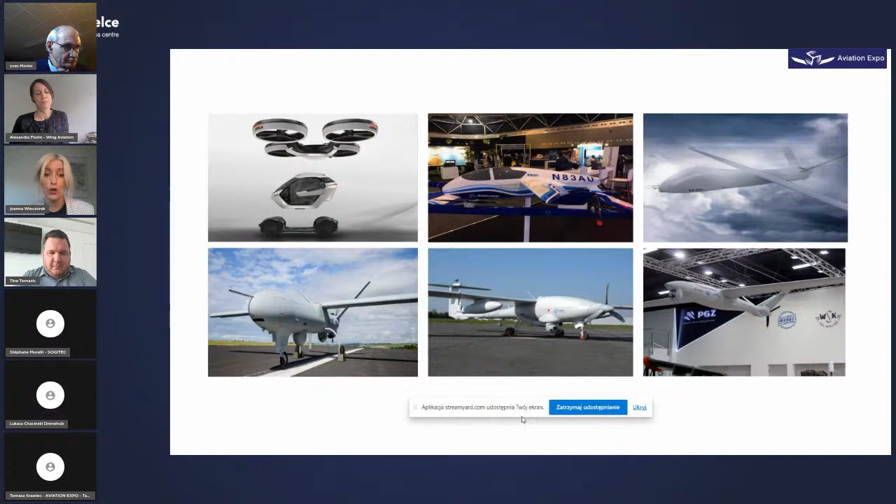As you all know, drones have many functionalities. We are here at this webinar, and we are all from the aviation sector and from the drone sector. But our audience, our viewers, sometimes are from different sectors. So I would like to just mention that drone applications are very large. Sometimes people will be surprised: how can we use a drone? For instance, we can save someone who is drowning at the seaside.

We can also use drones in agriculture. We can also use drones in the insurance sector for roof and site inspections. In Poland, there is a company called Flytronic, and they are using drones in order to reduce smog during winter time. We also can use drones for crime prevention. Łukasz Chaciński, representing Dronehub company, will talk about one project conducted with the European Space Agency, which is focused on crime prevention. We can also use drones for entertainment and leisure.

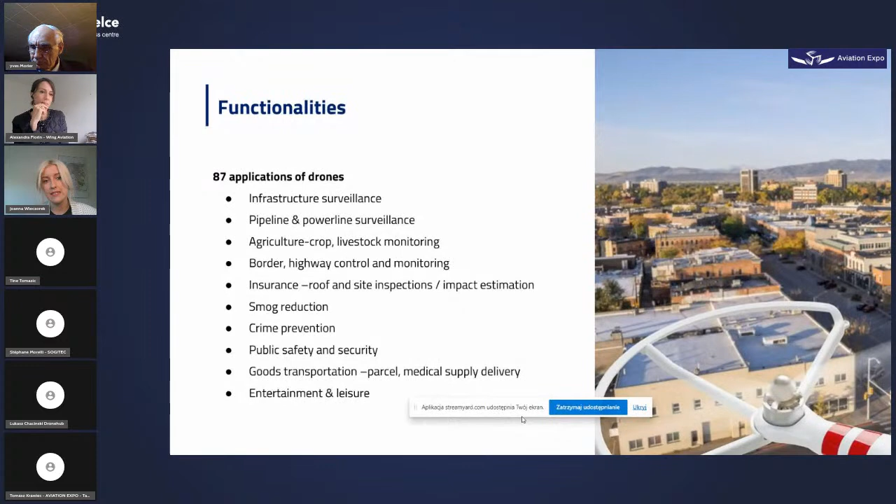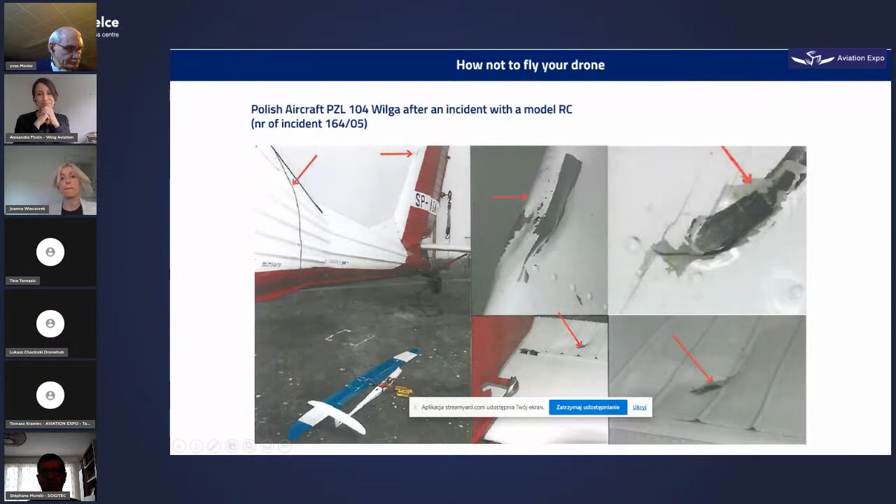Yves, do you hear us? If you need to unmute, it's in the left corner. Okay, do you hear me now? Yes, we can hear you. Okay, good morning everybody. Now I will try to work with the presentation. Do you see the slides? Yes, we can see it. Okay, thank you.

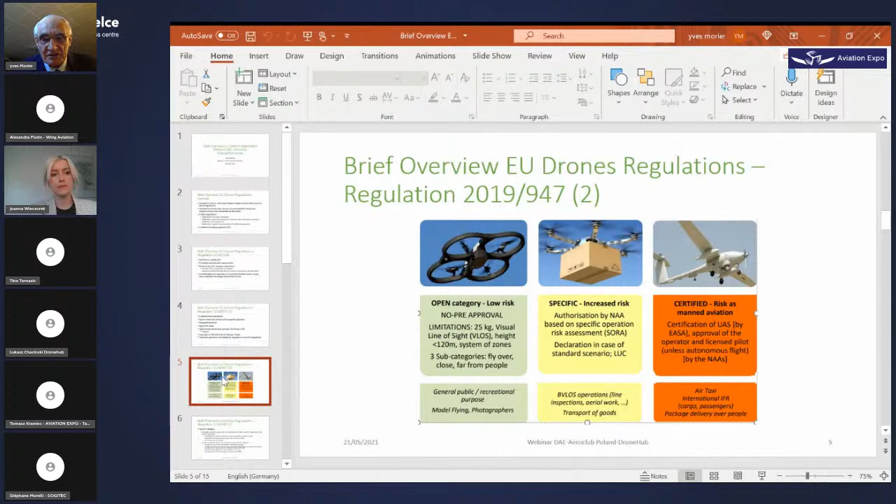Continuing on the specific category, so the principle of authorization after risk assessment, we have a simplification called the predetermined risk assessment, which I have summed up in the backup slide. The idea is that for some particular kind of operation, a risk assessment has been established a priori, and if it is being used, and if the mitigations are being used, this should facilitate obtaining the authorization.

If you apply a standard scenario, which covers low risk operation in the specific category - I have also put the two approved ones at the time being as backup slides - then a simple declaration would suffice. So here we come to a real simplification, but you have to apply strictly the mitigation measures included in the standard scenario.

Finally, the light unmanned aircraft operator certificate contains some privileges, and depending on the privileges you have, you may be allowed to start operation without obtaining an authorization. One point I just wanted to highlight is the design verification process for drones in the specific category.

In the case of lower risk, a simple declaration is enough. Where the risk becomes medium, a design verification by EASA will be performed, and EASA issues a report that includes any limitations or assumptions under which the report remains valid. So it's not a certificate, it's not a type certificate, it's a design verification. Finally, for the higher risk in a specific category, a type certificate may be necessary for the drone.

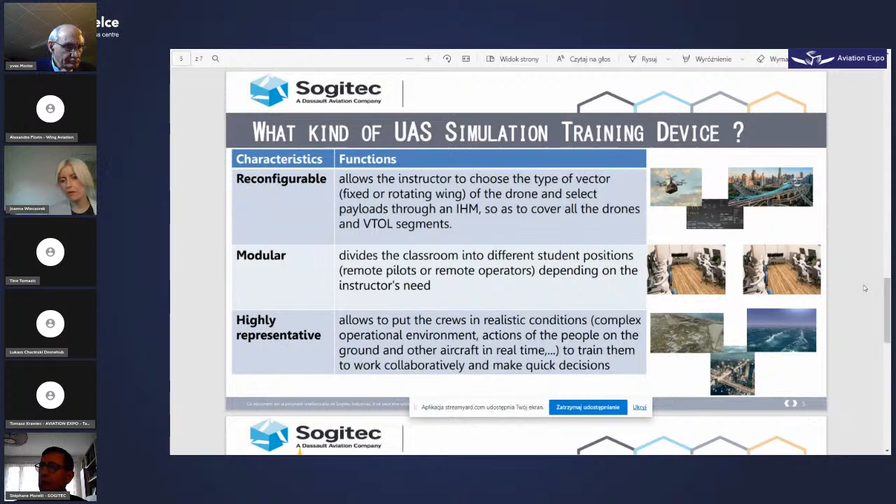And the last characteristic we recommend is the representativeness of the simulator, because the highest precision you have for your environment, the highest representativeness of this environment in terms of wind, terrain, and maybe people on the ground, the better it is for the training of your crew. So maybe next slide, please.

We propose now a simulator whose name is Genius, which will be shortly available, and which will be light, so it's non-specific hardware. It will be addressed to many platforms, from the mini drone to the MALE drone to the VTOL, for instance.

And it will be reconfigurable for different kinds of people that you have to train, not only the remote pilot, but also remote operators or other people who can intervene, for instance, in the case of multi-UAS flights, so maybe more flight manager than remote pilot.

Modular—I told you the organization of the classroom has to be very flexible, with very realistic capability of recreating the environment. Of course, we are now having a very important relation with the military forces, but not only.

Because we think that the civilian market will raise very soon for BVLOS flight, and that's the reason we are very happy to see the EU regulation authorizing this kind of flight in the specific and certified categories. So this is Genius.

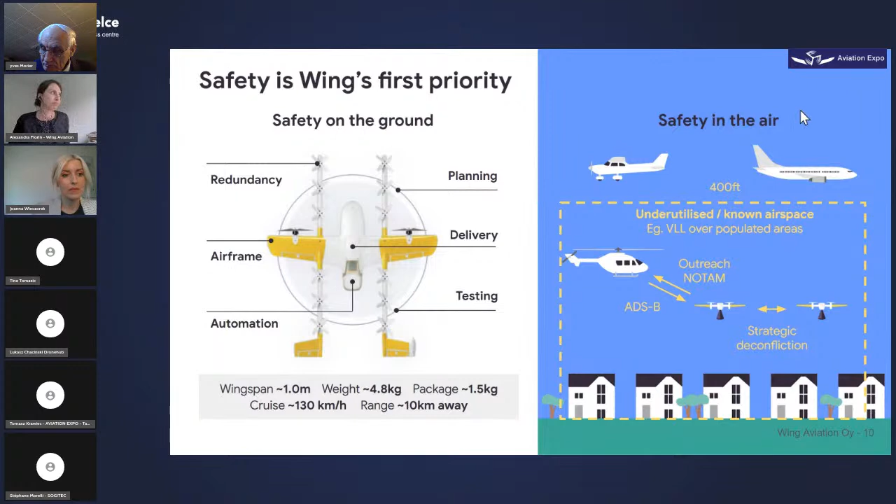So I already mentioned we are operating in Finland, in Europe, since spring 2019. The reason we are mostly in Finland is because our CEO, James, told us: if you can make it in Finland, because of the weather conditions, we can fly everywhere in the world. And it's true, it can be pretty cold, rainy, windy here. So we are testing all the conditions.

We are even testing some strange GPS configurations because we are so far north, toward the pole. So it's a very good exercise to be in such a country, and so far the reception by the public has been really incredible. People are really positive, and there's no complaint about noise or anything. And yeah, we are having more and more customers in Finland.

So what's next? Because obviously what we want is millions of drones in the future, so we really need to be able to scale up. And for this, coming back to what we were discussing, we believe that UTM, U-space, will be a key enabler. The existing ATM system cannot support the volume and diversity of drone operations.

So we believe we can use everything that's been learned in the past from ATM in terms of safety and security, and really build on this legacy. But there are some aspects of ATM that will not allow us to support the volume and diversity of drone operations. So my last slide, I believe, is to talk about what happens next.

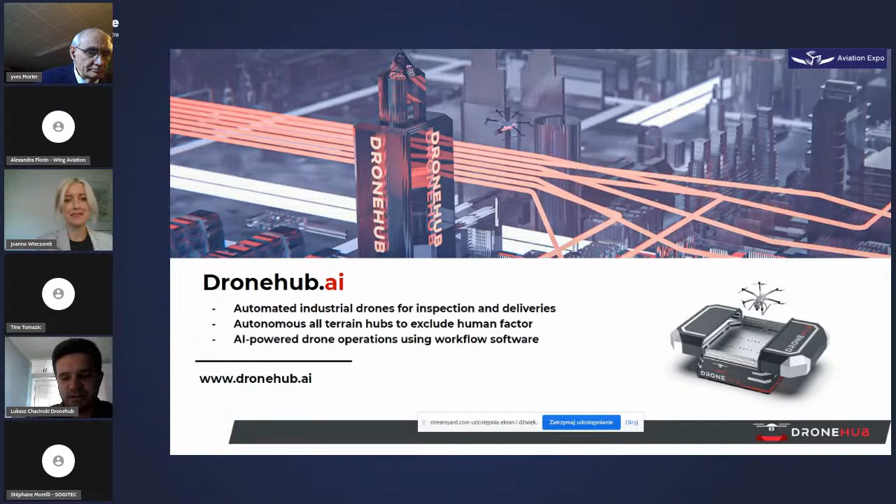Can you see my screen now? Can you see the presentation? Joanna, we see your presentation. Now it disappeared, oh no. We saw it for 2 seconds. Now it's the same again. Yeah, same. Yeah, all right, same. All right, so probably you see it now. So I will try to talk with you more about the drone delivery market as a whole. So let's start.

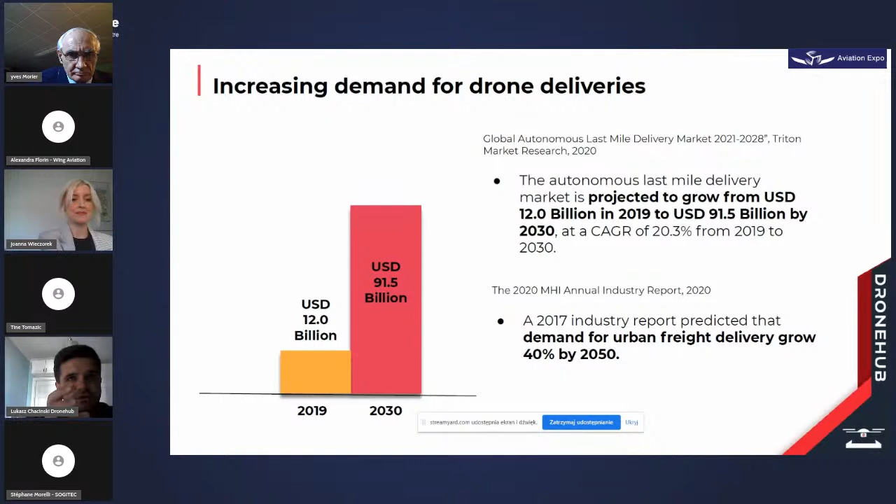The autonomous last mile delivery market is projected to grow from 12 billion dollars to 91.5 billion dollars by 2030. The delivery drones market was valued at about 2 billion dollars in 2020 and is projected to reach 4.6 billion by 2026, registering a CAGR of about 14% during the period 2021 to 2026. Due to the COVID-19 pandemic, there has been an increased deployment of drones for the delivery of a wide range of medical equipment, cargo, and parcels, among others.

This is majorly due to increased emphasis on contactless deliveries to remote areas at a faster pace compared to traditional delivery channels. This has led to increased demand for delivery drones in 2020 and also in 2021. With the increased demand for drone delivery services globally, various countries are easing regulations to support the operation of drones in their airspace. This is expected to accelerate growth in procurement of drones to offer new delivery routes for remote areas during the period I said before.

As the market is currently in its infancy stage with enormous opportunities in the industry, various companies such as Google, Amazon, and for example Deutsche Post have been investing in developing and deploying their fleet of delivery drones. Furthermore, over the years, various companies have entered the market that have performed their first flights and received approvals from bodies regarding the usage of delivery drones.

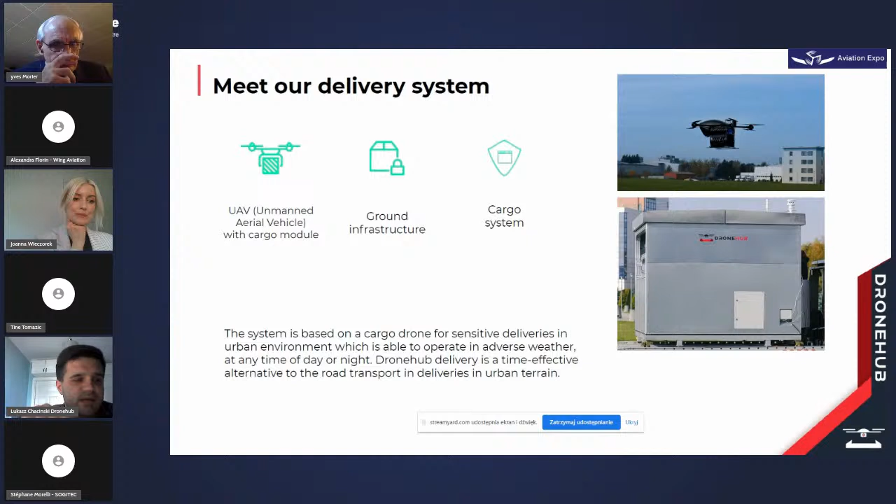As Dronehub, we are a producer of drone solutions that automate missions in large areas. Our main product is Dronehub, which is the place of autonomic takeoff, landing, the place where the drone itself changes the battery, and the place where the package is loaded and collected. Everything happens in a simple and automatic way. The package in the Dronehub is loaded into a special window after having previously entered a PIN number, and then the robotic arm picks up the package and puts it into the drone. The same robotic arm replaces the battery in the hub.

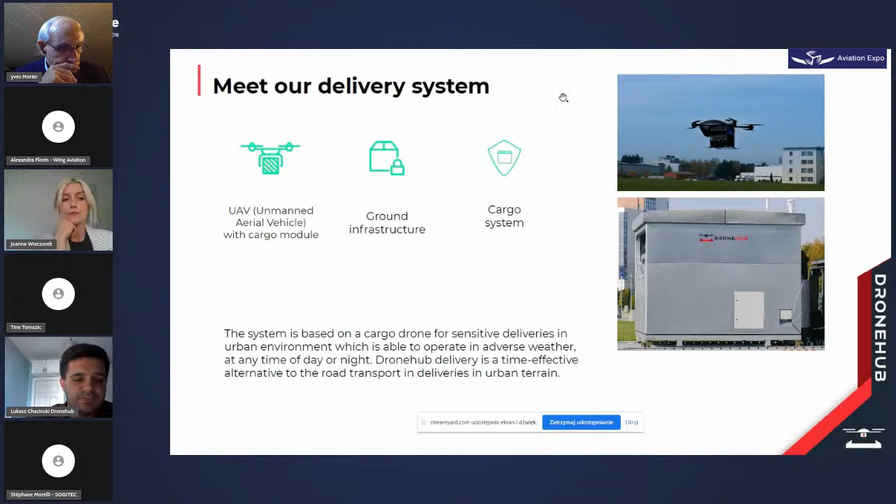The drone takes off and flies on a programmed route. At the next drone hub, the person waiting for the package can also pick it up after entering the PIN number. Everything happens safely and does not require the presence of a drone operator on either side. The drone operator can supervise the flight from the flight center, or a kind of security center. I will try to show you the film right now, how the drone hub, the cargo drone hub, works.

Hopefully. Łukasz, you have 3 minutes to go because we are running out of time. All right, but we have time for the video.

So that's how it looks like.

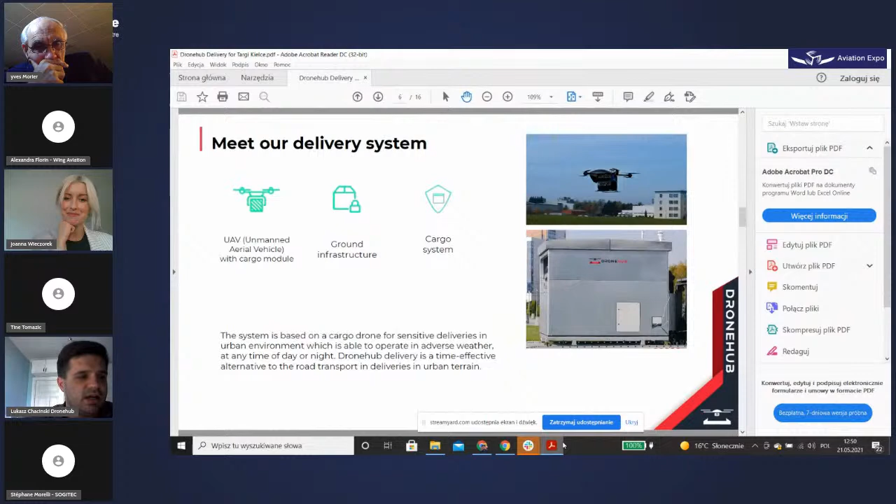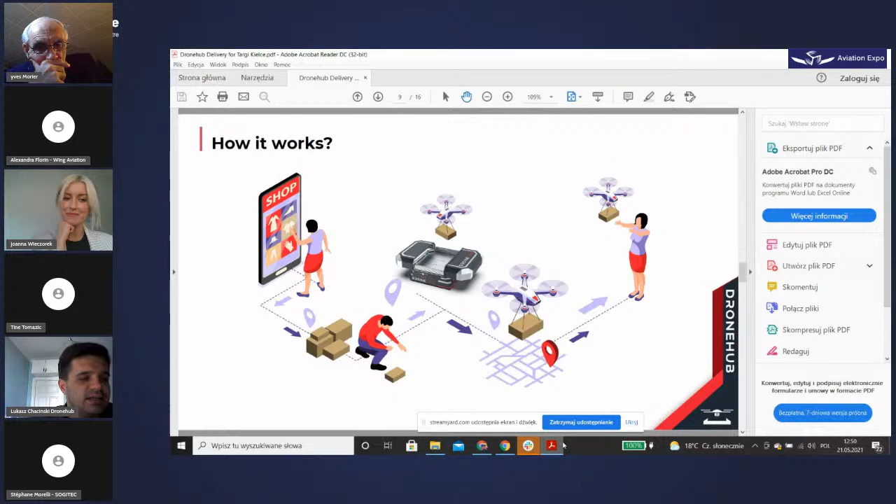Let me come back to the presentation. I would also like to say a few words about the cooperation of cargo airlines with drone companies. By cooperating with companies such as Dronehub, airlines can easily supplement their offer with last mile deliveries. Imagine a situation in which an urgent delivery of medicines arrives by plane, which should reach the person waiting in a hospital as soon as possible. Depending on the distance between the airport and the hospital, the drone, using drone hubs, is able to perform such an operation many times faster.

As we have no more time. No, go on, if you want to add something, please go on. All right, we can talk in a minute in the question and answer part, but finally, I would like to say

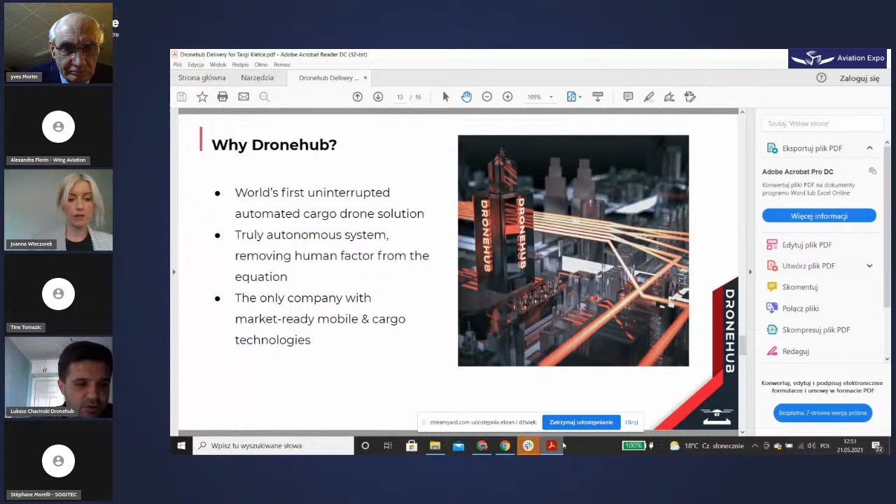that many years ago, when the first car was designed, people compared it to the horse, depreciating the invention of the car. The car became a common commodity many years later. The same will happen with drones, in my opinion. In order for drone deliveries to become universal, they need to be accepted by the public sector. Drone companies must show that their technology is safe and will not pose a threat in the sky and also on the ground.

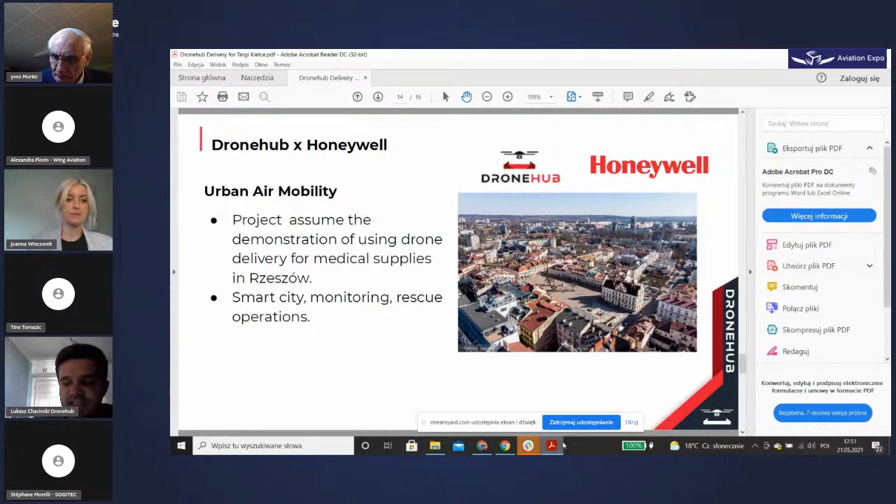And right now I would like to find out what are your plans for the future, and what the pilot project of the Decathlon company in Lublin meant for you, which started a drone delivery pilot project. What did this project mean for you, and was it in a way motivating?

It was a one-off test so far, but it shows the right direction for the e-commerce industry, or the delivery industry in general. We are glad that our colleagues, who we know each other of course, managed to successfully complete this test flight, regardless of the fact that we compete with each other as companies. We keep our fingers crossed for the development of the entire drone industry in Poland, and for the development of the drone delivery segment, of course, as we are a part of it.